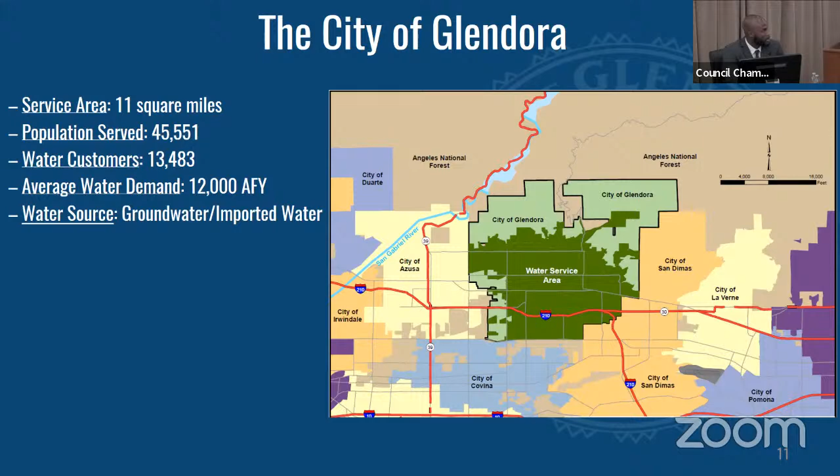Chair, question - go ahead. What is Glendora's water right in the main basin as far as the prescriptive right? That's based off the operating safe yield. Currently the operating safe yield is 150,000 acre feet a year, and Glendora's right is about 4.7% of that, which amounts to about 7,000 acre feet. So on average, Glendora is probably over pumping most years, right? We are over pumping, so we do have to pay the replenishment fee once we over pump. Thank you.

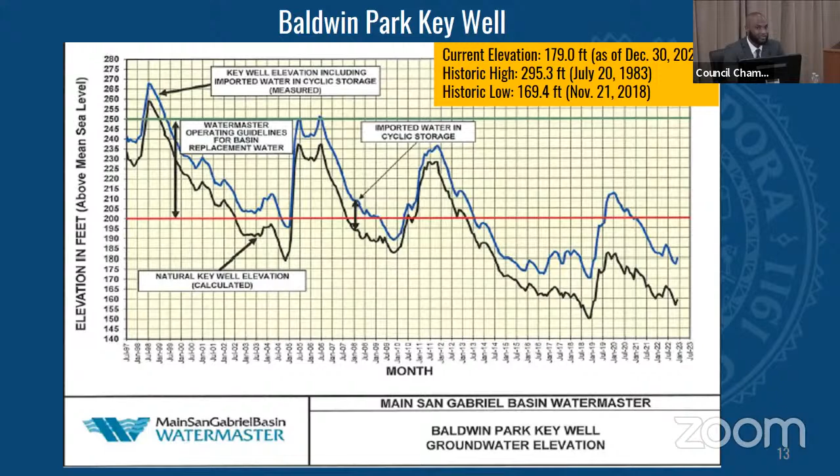This graphic shows the water levels within the basin. As you can see, for the better half of the past decade or so, we've been trending down with the exception of 2020. The blue line, the top line, represents the augmented water, that is water imported from Metropolitan, which is injected directly into the basin. Currently, our elevation within the basin is 179 feet, which is just about 10 feet from the historic low of 169 feet, registered on November 21st, 2018.

As mentioned, we really have a split of local supply to imported supply. With this slide, I wanted to show where that water source comes from, and more importantly, how it's impacted by hydrologic conditions. During dry years, we're not able to meet all of our water demand utilizing our local water supply. For example, in 2014, we had about 64% local water and 36% imported water to meet our complete demand. That's because during dry seasons our wells tend to dry up, and we just don't have the capacity to continue pumping out of the main basin given the current geographical location of our wells.

Conversely, in 2017, we were able to meet all of our demands utilizing water from the main San Gabriel Basin, as that was an exceedingly wet year for us. So the intent is to utilize our local supply as much as possible for a number of reasons. First, it's much more cost effective to pump water from the main basin as opposed to importing it from Metropolitan Water District. We also experience better water quality and operational benefits. Lastly, in 2021, this was another dry year for us in which we had to augment our supplies with imported water from Metropolitan, about 19%.

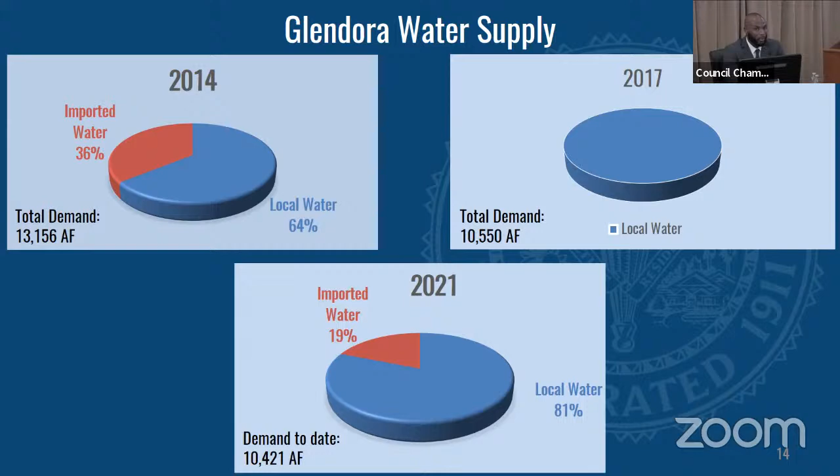Lastly, I want to talk about our existing infrastructure. Within our service area, we have about 210 miles of water service mains, ranging from 6-inch diameter pipelines to 30-inch transmission mains. We also have 29 storage reservoirs, which are above ground with a total storage capacity of over 34 million gallons. We have a number of booster stations strategically located throughout the city, and as mentioned, we have 8 active wells. One thing I want to emphasize on this map is that a lot of our infrastructure, our pump stations and reservoirs, is located on the northern part of the city. This is because we utilize gravity to feed the southern parts of the city, saving on energy as much as possible. So this is primarily a gravity-fed system.

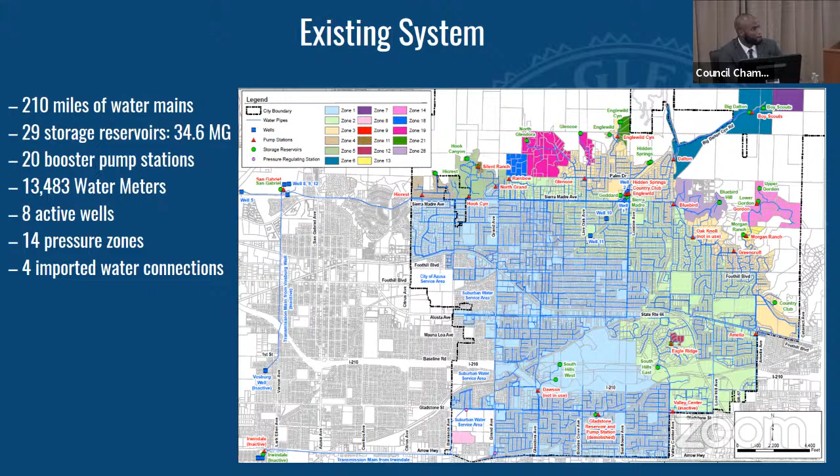Chisholm asked a question on the Irwindale project and Vosburg. Haven't done the math, but if you take a look at those 3 wells, 3, 4 and 7, as I recall, it's something around 6,000 GPM, which could produce about 7,000 acre feet a year for the city. That is correct, so it's about 6,200 GPM from those 3 wells, and that is more than 50% of our annual demands. So that will again bolster our reliance on local supplies.

But you have 3 Valleys and Puente Basin involved in that. So they, Puente Basin, they're trying to export out of the basin. That is correct, so they are. Didn't we do this project? We studied this like 15 years ago. Well, there's new people involved now. Yeah, it was a great project. I don't know what happened to it. Right, it's back. Yeah, and again, we're very excited to kick that back off. We do have these new partners involved.

Lastly, I want to say the Irwindale facility will benefit us in multiple ways. It will allow us to fully take advantage of local supplies and become reliant on local supplies, which is much more cost effective than imported water from Metropolitan. More importantly, it secures our water supply future, especially with the recycled water from Metropolitan. We'll be able to take advantage of that drought-proof water, which will help our water supply sources. Lastly, those wells will get us into the healthier and deeper portion of the basin, which will help us become much more resilient to drought impacts. So that concludes my presentation, and I'm happy to take any questions.

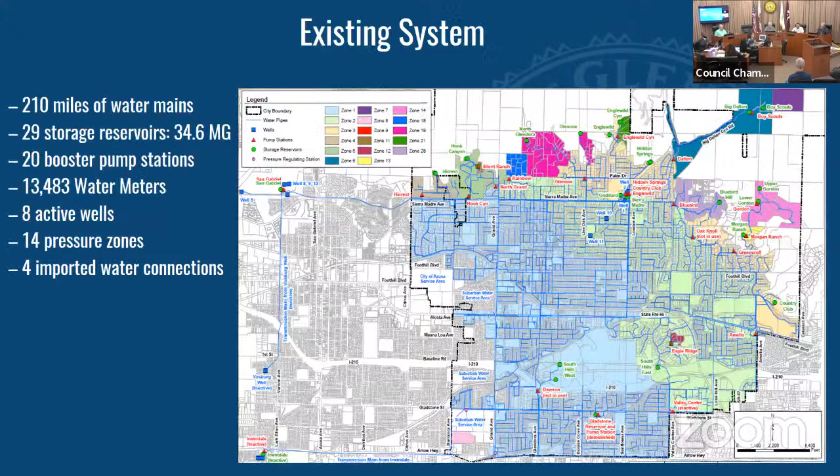That is correct. Pat, you got a question? I did - I don't know if you can go back to that bar chart you showed of the last several years of usage. Seems like an interesting pattern after 2014 where it dropped off significantly in total usage, then increased, came down in 2019, and then back up again. Is there any correlation between that and some other factor? Why would there be such sporadic changes over the years?

Certainly. If you recall, 2014-2015 was the first time then-Governor Brown issued the emergency, a 20% statewide reduction mandate, and that played a huge role in our water demands within the city. We were able to implement that water shortage plan, and we started to see our demands taper off. They did start to pick back up in 2018, 2019 when we got wet seasons again. What we try to educate and instill in our residents is that water conservation and water use efficiency is a way of life, not just dependent on hydrologic conditions. If we can sustain our water conservation efforts rain or shine, that is the way to secure our water supply. Thank you.

Just one question, Mr. Chair. You have four MWD connections - are they all with Three Valleys? No, we have three connections with Three Valleys, and one with CIC, Covina Irrigating Company.

Covina, is that an MWD connection? Well, it's the connection from the San Gabriel pipeline in Sierra Madre that ties into the CIC plant, but it's Three Valleys water. And then you've also got a connection up at Big Dalton, right? That's the PM 26 - yeah, that's Three Valleys as well. That's a raw water spreading connection. Thank you, Bill.

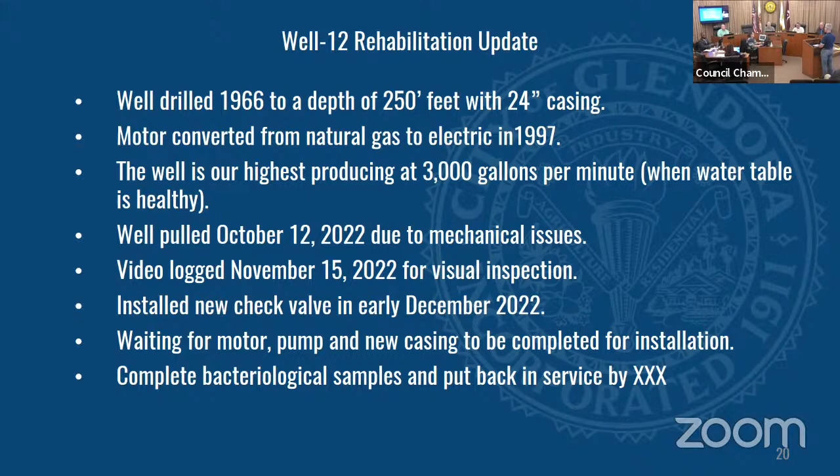And the water level should come up if they're spreading water up there, right? It should follow that, yes. Currently, we are receiving some water that's coming from the dams, so we are seeing an increase. Current pumping level is about 95 feet dynamic. When the well was down to the 900 GPM capacity, we were down closer to about 125 to 130 feet pumping. So historically we've had to shut that well off at one point due to low production.

Was that well drilled down to bedrock? Yes. So when Azusa pumps, they can suck you dry. Well, we're not influenced directly by their pumping, it's more about the water level in the basin, correct.

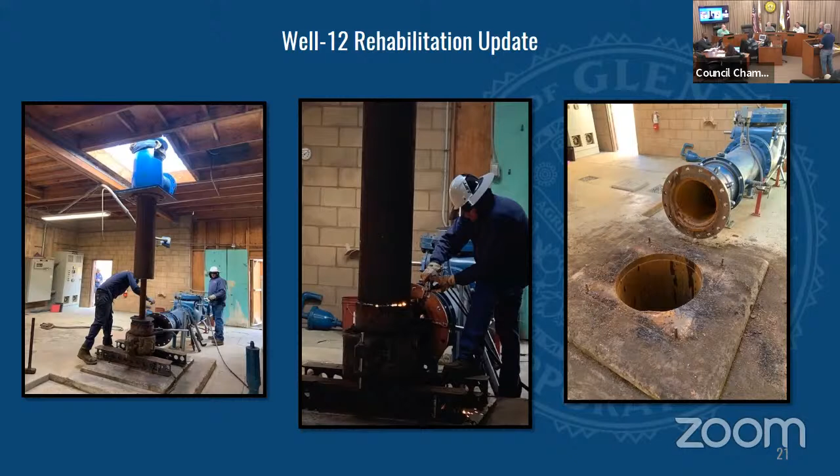What's traditionally the static water level for that? Currently at this time of year, we'd like to see probably about 45 to maybe 60 feet. It's been as high as about 32 feet static, but that was definitely in wetter times.

You've never had a well that pumped more than 100 gallons a minute? Well, at a different place I had, it took like 600 feet to hit water, that's pretty good. And the electricity's a lot cheaper too to pull it up, so that's good. But you're severely impacted, there's no water in that canyon, you're done. That well definitely is under impact.

The influence of water that's spread by the natural outflow from Morris or USG3, or when they let water out, the Corps of Engineers or the county? Yes, okay. Question, Pat, go ahead.

You mentioned the volume pumped went down significantly. Maybe an elementary question - was it the deeper you go, the slower the output is going to be, or what was the factor for that decrease by two-thirds in your volume pumped?

Just a decrease in the water table out at that San Gabriel pumping plant. Quantity of water, not the depth per se. The total depth of the well is 250 feet, and I believe...

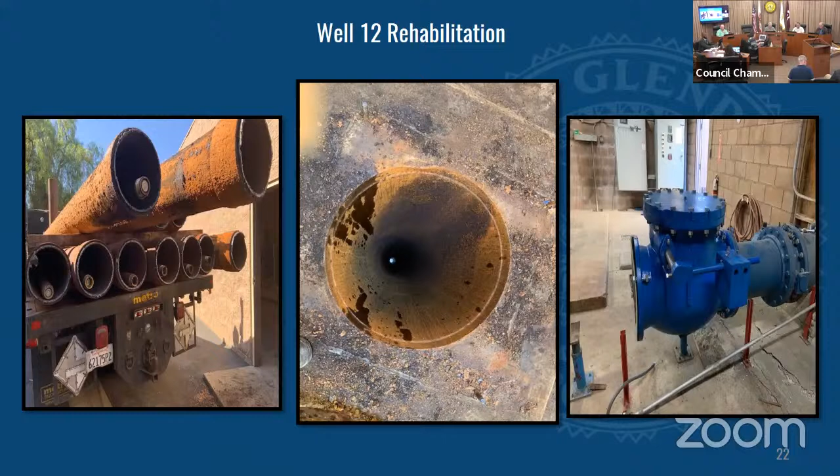So the next item is the consent calendar. This is - what do we have here? The minutes from July 28th. This item on the consent calendar will be acted by one motion unless commissioners would like to request discussion on any item. Does anybody wish to discuss item number 3?

No? Okay, could I have a motion to adopt and receive and file? Just to be sure, these minutes were included in the agenda packet, right? Correct, yes. So do we have a motion? Yes, but without having you guys affirm them, we can't get them approved. So as long as you guys read them from the agenda packet, then you guys are okay to approve. I did check with the city clerk, so. Right, okay, so you'll second. Perfect. So a motion made by Commissioner Cece, seconded by Commissioner Holmes.

I will now conduct an oral roll call vote. Commissioner Holmes, aye. Commissioner Cece, Commissioner Thomas, yes. Vice Chair Nakano, yes. And Chair Hansen, yes. Motion carries 5-0.

Okay, now we'll move to item 4, we dealt with water supply outlook. We'll invite Water Division Manager Dale Wirt to give us an update. Good evening, commissioners, thank you for having us here today. I'm going to cover the water supply outlook.

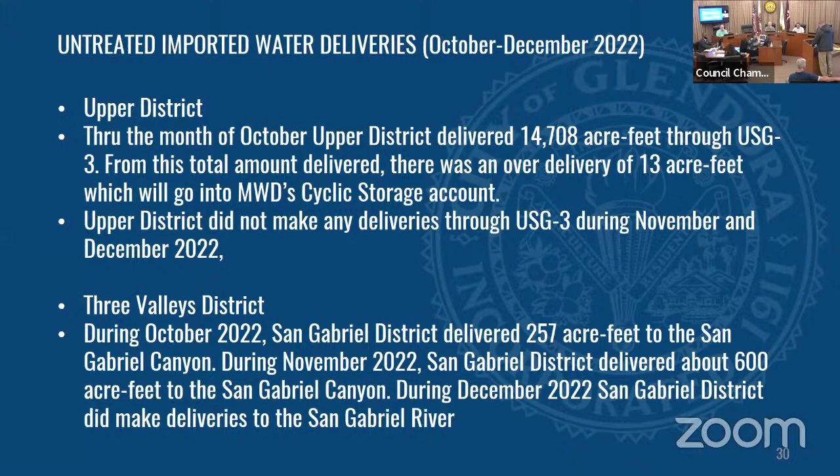Three Valleys District during October of 2022 - San Gabriel District delivered 257 acre feet to the San Gabriel Canyon. During November of 2022, San Gabriel District delivered about 600 acre feet to the San Gabriel Canyon during December of 2022. Let's see, next slide.

I apologize, that copied twice, so it's going to be the same information. And we'll have Three Valleys - I don't believe Three Valleys made any deliveries during that time. Let's see, so there's some pictures.

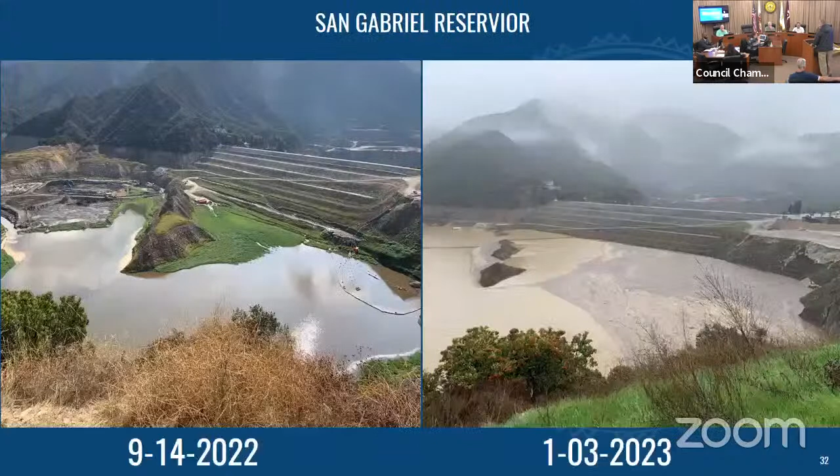This is the San Gabriel Reservoir. Picture on my left, your right, is from 9/14/2022, shows a reservoir relatively low. In the background, you can see they're doing some work around the intake gates, as well as clearing some of that silt and debris from the bottom. January 3rd, of course after some rains, it's quite full - you can still see the peaks of the islands out there. They picked up and finished their work there in late October.

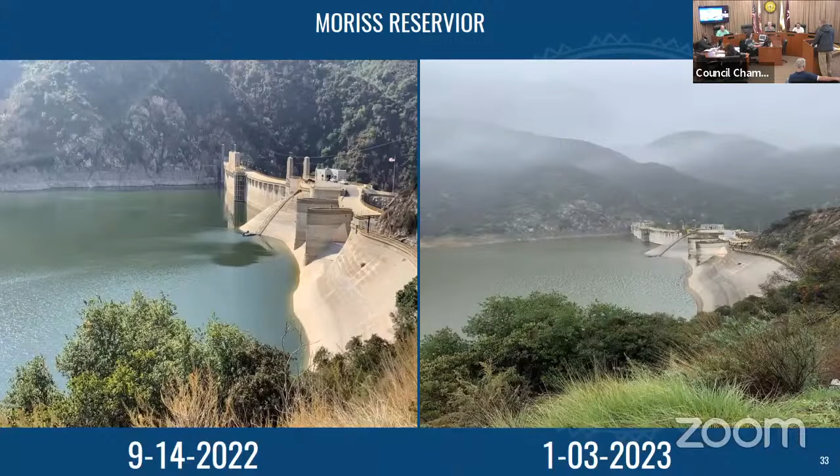Next is the Morris Reservoir - not too much difference you can see between 9/14/2022 and January 3rd, 2023. They've been keeping that pretty much full while they were doing work upstream in San Gabriel Reservoir.

All right, key well information. Chisholm did give an update on this. This is a little older.

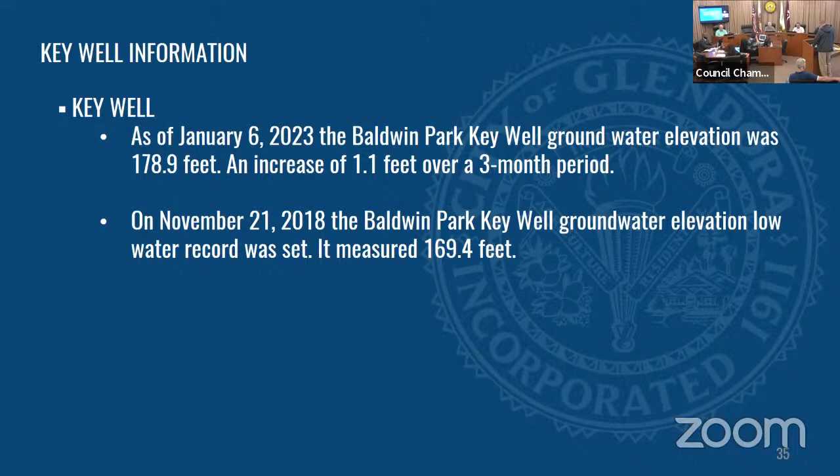As of January 6th, 2023, the Baldwin Park Key Well groundwater elevation was 178.9 feet, an increase of 1.1 feet over a 3-month period. On November 21st, 2018, the Baldwin Park Key Well groundwater elevation low water record was set, measuring 169.4 feet. We're not too far from that.

Our water production and treated water purchases between July and September of 2022. Well production through October was 649 acre feet, November was 624 acre feet, and December was 573.62 acre feet. We purchased from Metropolitan Water during those same months: October was 168.8 acre feet, and November was 9.28 acre feet. We didn't purchase any Met water during the month of December.

Some updates, these were as of December, on California and Colorado projects, rain and snowpack information, some of which has drastically changed. As of December 2022, the Northern Sierra snowpack was 150% of normal. The Upper Colorado River Basin snowpack was 106% of normal. Storage for this time of year in California, due to heavy precipitation, was close to normal. Storage in the Colorado system, due to extreme drought conditions, was only at 23% of normal for this time. The California state water supply allocation had been set at 5%.

May I ask, what does that mean exactly, 5%?

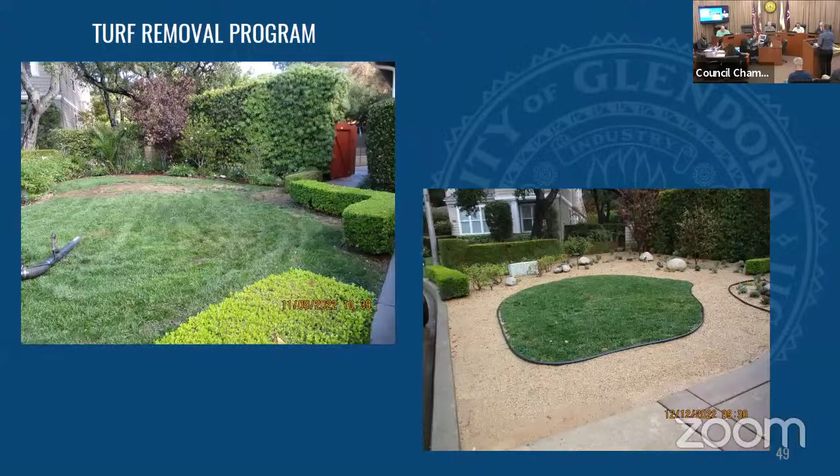These pictures give you a sense of our turf removal program. In this picture you'll see we do qualify dead grass as long as you've had grass and sprinklers — we understand you're complying with our stage 3 water restrictions, and if you want to transform your yard into a water efficient landscape, we will certainly help you. Here's an example if you want to keep a little turf for the kids or the dogs — you can still reduce the amount of water you're using and keep some functionality in your backyard.

These are the numbers of our water usage comparing 2022 to 2021. Overall there's an 8.16% reduction, but if we look at 2020 to 2022, we have an 11% reduction. In the last 4 months we've actually met our 20% reduction goal and exceeded it. I'd also like to point out that city facilities and parks overall in 2022 have reduced their water usage by 37% compared to 2020 — they've done a fantastic job.

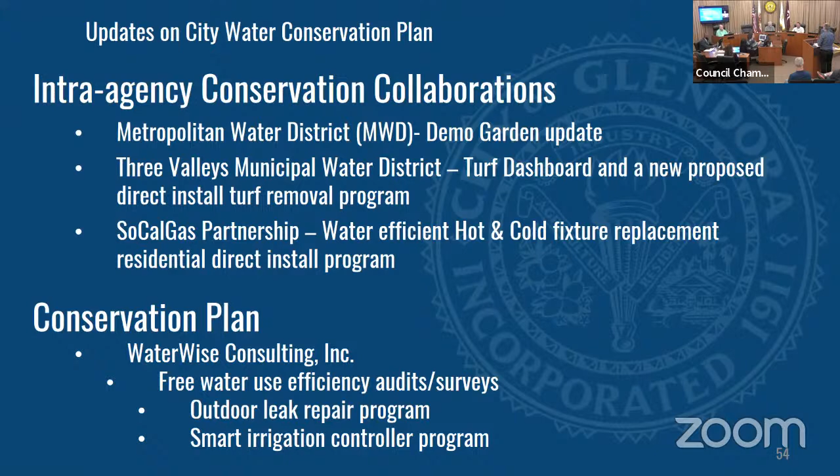So as far as the messaging of conservation, is that falling under you? You were talking about the marketing and so forth, is that falling under you? What do you find to be, or do you have the data, on the best source of getting that message out to residents? Do you have an idea what the best way of getting that messaging out to them is?

Direct flyers are very effective. Sending it straight to the home, we like to do that. It's expensive to do that. The bill inserts are a little less expensive, but that's also a very effective way. So directly sending something with information on it tends to be the best way. We do social media, Facebook, we do all of that as well, but I think we've been most successful with that sort of outreach.

The reason I asked this is it actually came up when I was interviewing with the city council, and they were saying that there's signs around the city, and apparently there was a sign somewhere on Gladstone, by where I live. I said I never saw the sign. I'm pretty observant. And one of the council members at the very end said, oh, the sign was there, but then it got moved. And that was the end of the discussion, which is fine. But my thought was, why did the sign get moved? Do we have it in our budget to buy another sign, to put that sign wherever it went to, so we can leave the sign there?

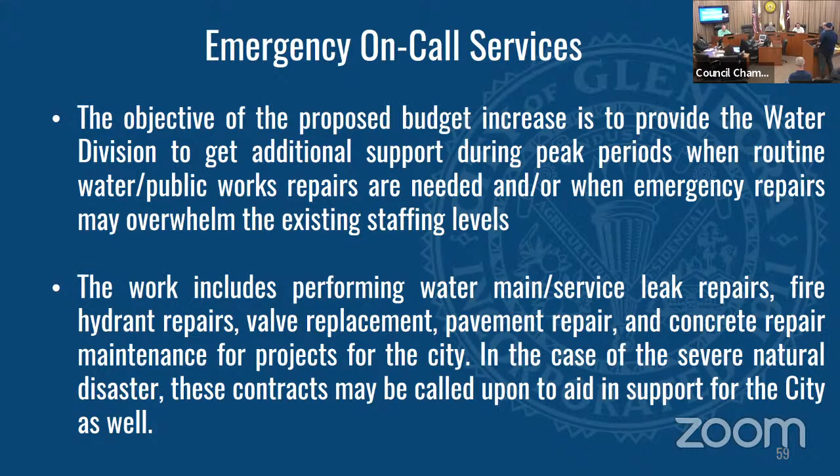So our emergency on-call services - the objective of the proposed budget increase is to provide the water division additional support during peak periods when routine water repairs are needed and when emergency repairs may overwhelm our existing staff. This work includes water main service and leak repairs, fire hydrant repairs, valve replacements, pavement repairs, and concrete repair. Also, in case of severe natural disasters, our emergency contractors are called upon to help us out during those times.

So just an overview of some of the water leaks - within this past fiscal year, we've had a spike on larger diameter pipes, ranging from 16-inch to 20-inch, that has required, unfortunately, extensive repairs and replacements of those pipes themselves. What the pipe material - what kind of pipe material is that? Most of them are all steel. Steel? Yes, most of them are from the 50s to mid 60s.

So just last fiscal year, 21-22, we had a total of 221 water line leaks. This fiscal year, we're estimating just from July through December about 223 leaks based on the forecast so far. That's all leaks - mains, laterals, services, fire hydrants. This does not include meter leaks, which would be a separate category.

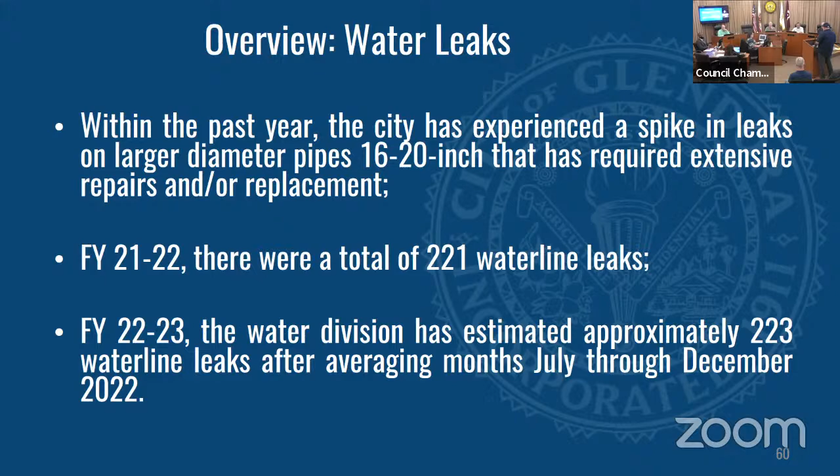Is there a particular reason for the leaks other than age, or is that the main factor? Yeah, the main factor right now is just age and the infrastructure itself.

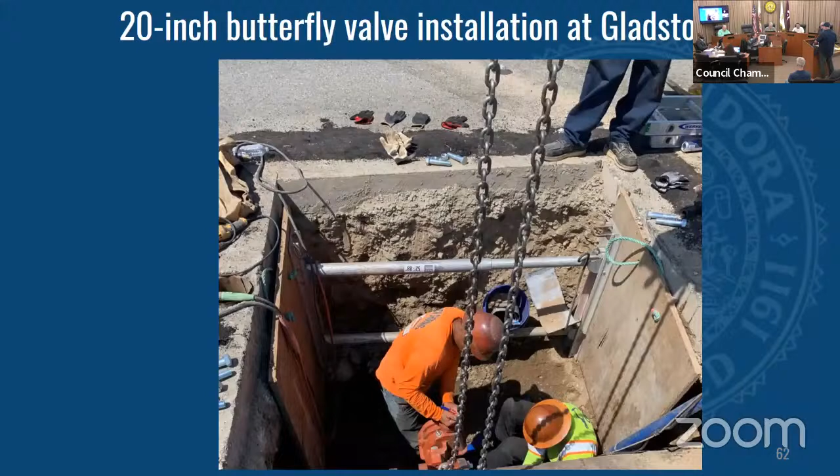This is part of the same project on Gladstone. From installing that line stop from the first photo, we were able to install a new 20-inch butterfly valve to help isolate our 20-inch line there in Gladstone for any future leaks that appear in that area, so it'll be easier to isolate and make the repairs safely.

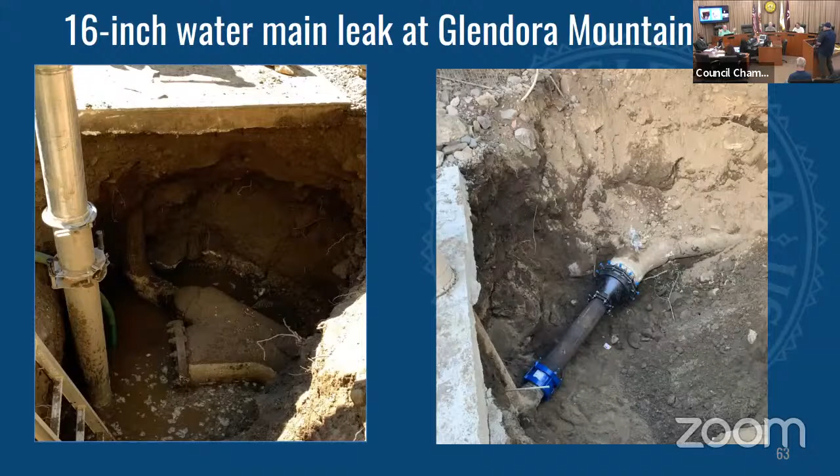That's a standard procedure - if you've got a line between valves, you'll cut one in to better isolate leaks in the future. Correct. That specific project on Gladstone was performed by our emergency contractor, T.E. Roberts.

So this next leak, the photo on the left is at our Booster 31 station right at Glendora Mountain Road in Dalton. We had a 16-inch mainline leak there, connected to an 8-inch line right at our booster. For that one, we had our contractor, Big Ben Engineering, come out to help us. You can see the photo on the right is the repair that was made, transitioning from an 8-inch into a 16-inch.

This was another major leak, another one on Gladstone, probably within a couple hundred feet of the first leak. This one was on a different line though - a 16-inch line. This photo just depicts a temporary repair that was made. Ultimately, from this leak, our contractor JDC had to install about 80 new feet of water line to make the actual repair.

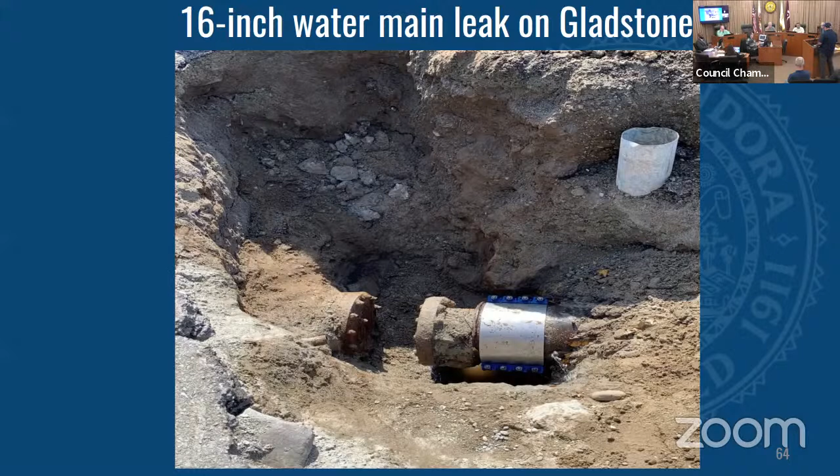That concludes my presentation. Our recommendation will be to the city council to increase the contract amount for our emergency on-call services for fiscal year 22-23 in a total amount of $225,000.

Great, thanks Jason. Any questions from the commissioners? David? How will the extra cost be covered by the city?

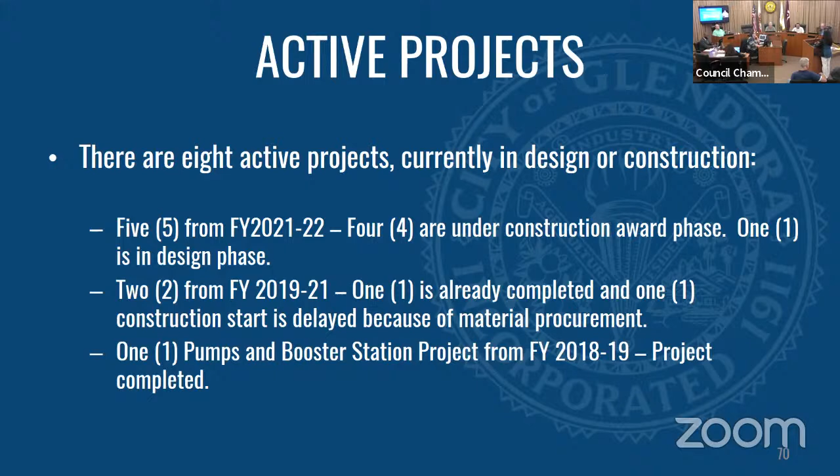Let me go over the active project list quickly. Bennett, Westridge, Washington, Bender Water Improvement Project — this is combined with the street improvement project. It will replace 7,000 linear feet of 8-inch pipe. The water portion is going to be almost $3 million, and this project is going for council award on the February 14th council meeting.

Does that go over in front of Sandburg Middle School? Yes, sir. But that's the street, not the water pipe work. The pipe work will be starting from Barranca Avenue, Sandburg, La Fetra, and going towards west up to Pennsylvania. And you'll do that in the summer when schools aren't in session? Yes, that is a condition for construction, that the work will be done during a school break. Water and street portions are both being awarded at the February 14th council meeting, and at this time we are not sure what the material procurement status will be. We're hoping it can be done this summer, we will see how that goes.

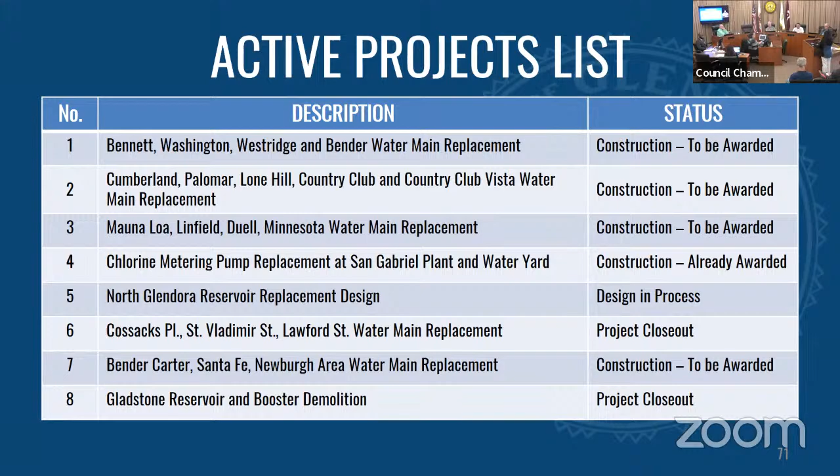Now I'd like to show you the North Glendora Reservoir project. This reservoir is on the very north end of Glendora Avenue. Currently it serves 50 to 60 homes in the area.

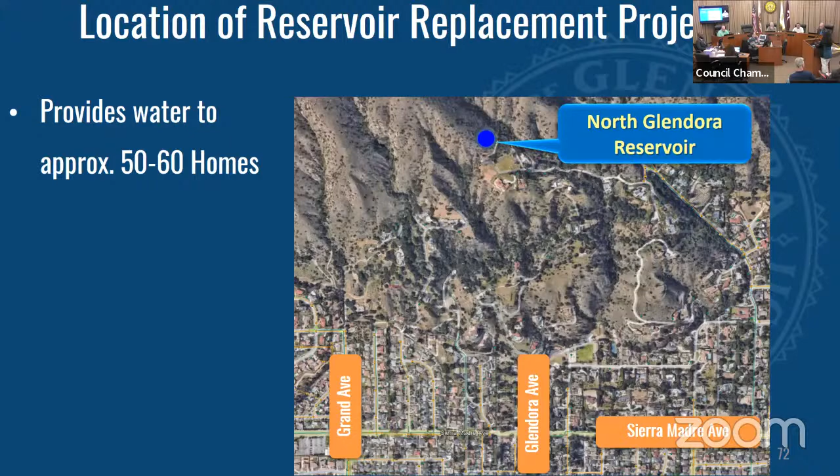Existing capacity of the reservoir is 318,000 gallons. It is a bolted steel material installed in 1997. It was observed that the tank is heavily corroded and major leaks were observed, as you can see in these pictures.

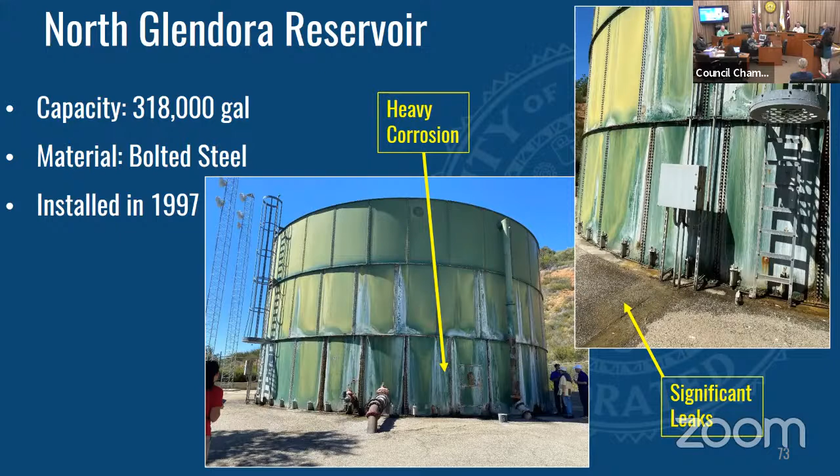The proposed project will be 2 welded steel reservoirs. As you can see, first a new reservoir will be built, and after that the existing reservoir will be taken out of service. Once the new reservoir is in service, the old reservoir will be replaced with a new one.

Both new tanks will be 50 feet in diameter, welded steel, and the usable volume of the combined 2 tanks will be 499,400 gallons. Minimum volume required is 438,240 gallons. So that provides us an additional 12 to 13% capacity for future usage.

What does that mean? The capacity required for the existing usage, that is.

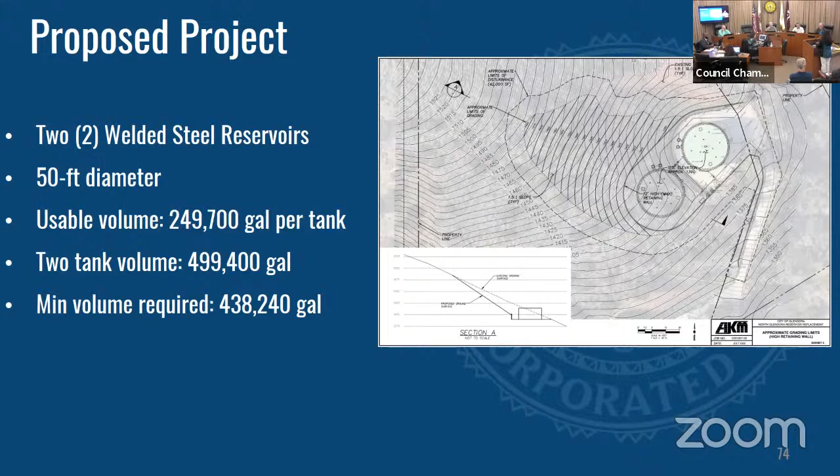For this project, the design consultant cost is $474,465. Design consultant is AKM Consulting Engineers.

To start the project, since it is by the hillside, we did a comprehensive land survey. Johnson and Frank Associates were the surveyors. The survey is done. It also, because of its location, needs an environmental study that is ongoing.

We have another consultant doing the environmental study, and because of the season, their study will take longer. It will be completed after the rainy season, when the vegetation and the birds are back.

Consultants are working on the layout and design parameters. Design is 60% complete and is under review with the city. We are hoping the design will be finished by May to June of this year.

Once the design is complete, we will have the estimated cost. We will go back to the council and start the construction bidding process.